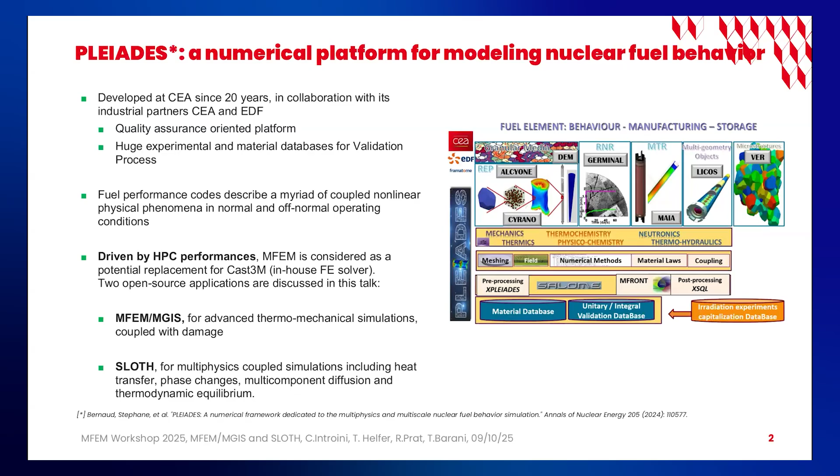So, MFEM-MGIS in a nutshell: basically the idea is to write a generic thermomechanical solver based on MFEM for everything related to finite elements, linear solvers and nonlinear solvers, and two libraries that I wrote called MFront and MGIS that I will describe in a few minutes. Basically the idea is that everything related to the material knowledge that we introduce inside the simulation is handled by MFront and through the MGIS API.

I've shown 4 years ago that one of the goals was to provide a very high level API which is able to describe solvers, preconditioners and boundary conditions, and focus on the physics so that engineers can use it directly without being, I would say, distracted by numerical details.

So the main focus was to be able to describe multi-material models, small and finite strain analysis, isotropic and orthotropic material laws. Most of them were not available in MFEM at the time, so this is something that we added to MFEM in this library. So I give you some references, the GitHub website and the repository, and also a link to the tutorials.

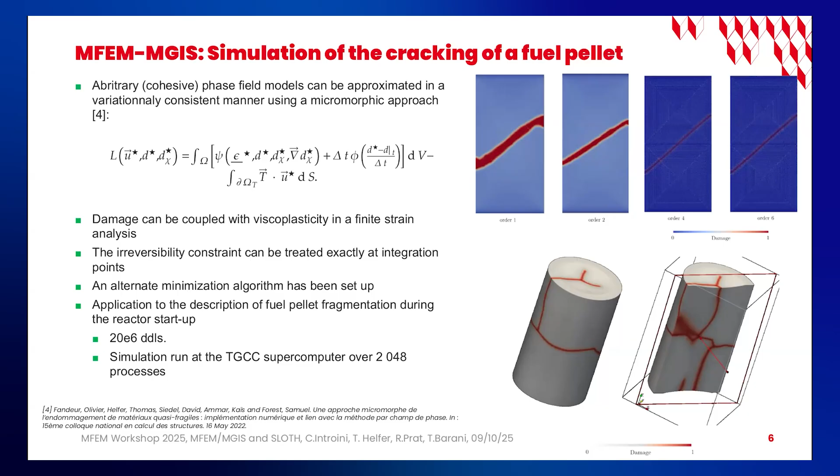And also, we have to mention that the crack propagation is unstable and that you have to break the initial axisymmetrical mechanical field to localize the damage into those cracks, which is quite difficult to do. And we were quite happy with the alternate minimization algorithm that we have set up because we were able to describe this complex crack network, which appears in quite an unstable manner.

So I will go a little bit further to other examples of what we are able to do. In this example, we describe a representative volume element of nuclear fuel, and this is done by my colleague Tommaso Barani. And we try to model what can happen during fuel annealing after irradiation. What happens during irradiation is that we create bubbles with pressurized gases.

And if we anneal the fuel, pressure inside the bubbles increases, and then you have fragmentation of this RVE, which leads to release of fission gas products. So we have set up, in the context of a European project called OperaHPC, a simulation of those effects, and we were able to describe the progressive rupture of the matrix with a very simple model and try to correlate that with the experimental data.

And I'm sorry, it's not quite readable, but you have the experimental data in blue, and at the very beginning of the annealing, we have a good correlation between the release of fission gas products, which comes from the cracking of the bubbles, and the experimental data. So a good correlation between simulation and experimental data.

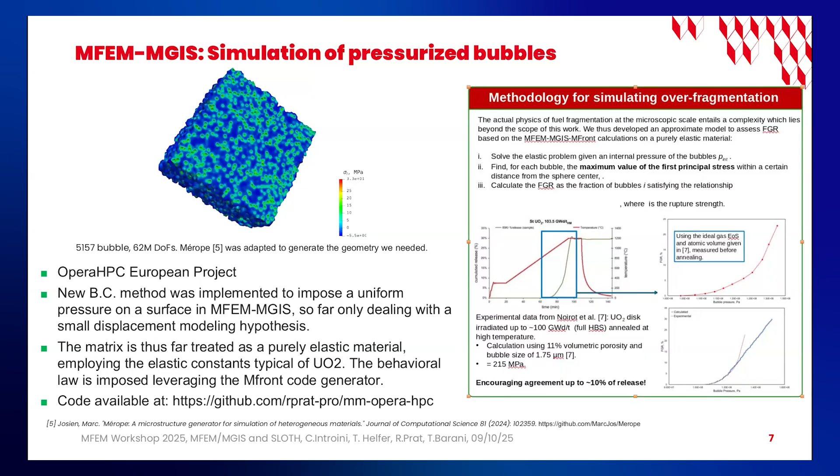Another example, just to show that we do a lot of periodic computations at the RVE level. It's a description of a specific nuclear fuel called mixed oxide fuel, which contains uranium and plutonium. And in this case, we just modeled a matrix and an inclusion, and we try to compare performances and

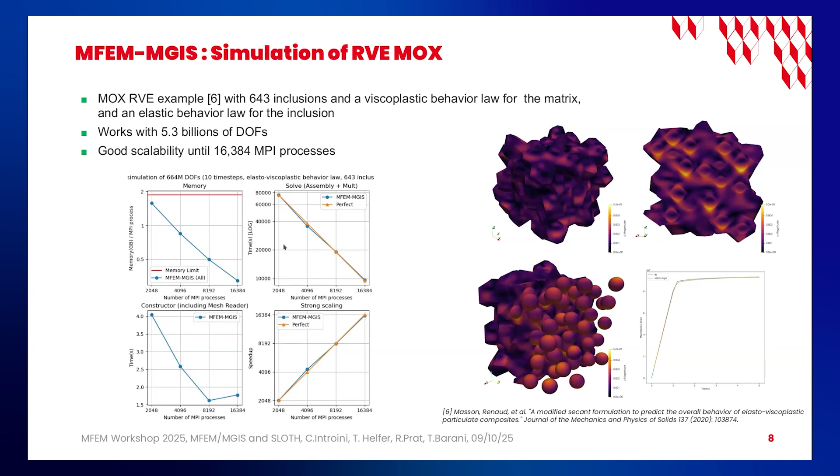make some verifications of MFEM-MGIS against fast Fourier transforms, and also try to measure the performances of MFEM-MGIS on our clusters with good strong scalability, as shown on this figure. So this work on the solvers was mostly done by Raphael.

Last thing that we wanted to mention, MFEM-MGIS is now mostly focusing on post-processing, and we have developed a library to do things dedicated to mechanics. For example, what we do in finite strain analysis is that we have this first Piola-Kirchhoff stress, which is very convenient for the developers of thermomechanical solvers, because everything is simple with this stress, but it's not quite meaningful for the user.

So we have developed post-processings, for example, a post-processing which is able to take the first Piola-Kirchhoff stress, transform it to the Cauchy stress, which is what the user expects, and then rotate it in the global frame for orthotropic behaviors. So we have introduced a lot of post-processings, which are quite interesting for most solvers.

So this module is also solver agnostic. So if you ever have your own finite element solver, maybe you could be interested by those developments.

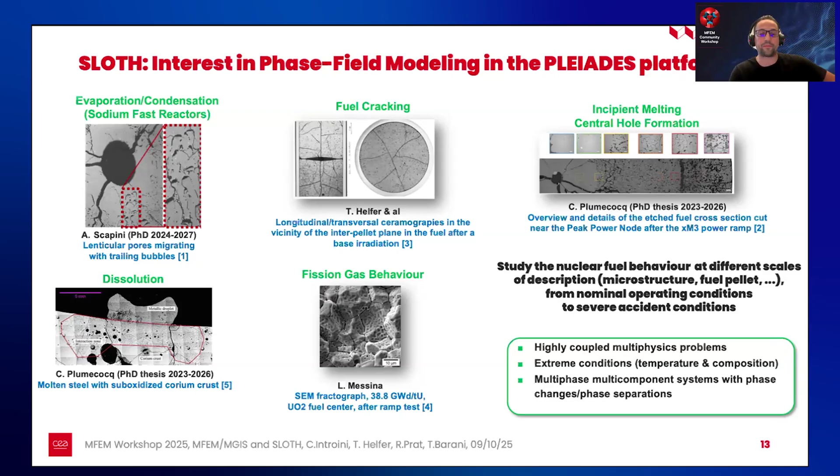So we have developed SLOTH on top of MFEM in C++. It's a small code developed since 2023. It's open source, developed under the LGPL license. So SLOTH provides the Cahn-Hilliard equation, the Allen-Cahn equation, but also the multi-component diffusion equation and heat transfer equation. And in order to perform the multiphysics simulations of interest for our nuclear applications, we also have a coupling between computational thermodynamics and SLOTH in order to perform CALPHAD-informed phase field simulations.

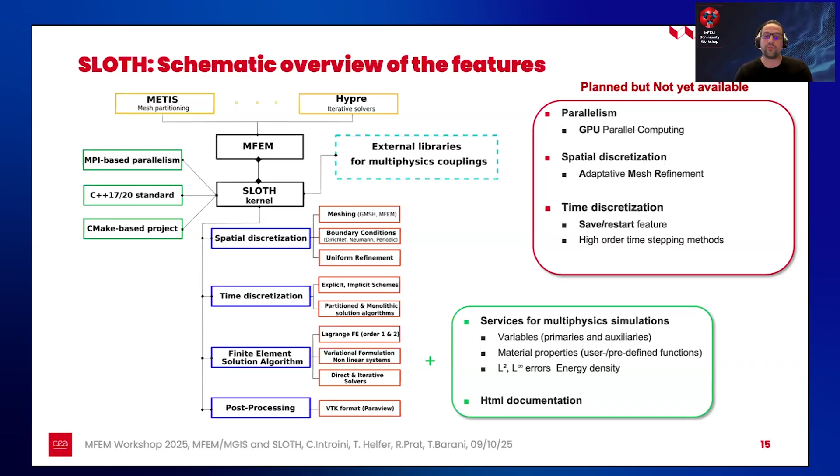You've got about one minute left in the presentation. Oh, okay, very quickly. Sorry. Okay, I present this slide and I finish by illustration.

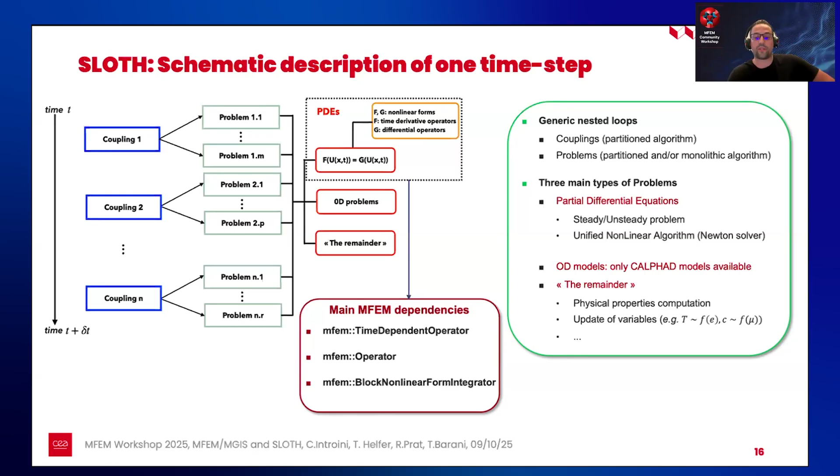So to conclude, I will show you this calculation. It's a very fresh result. It concerns the implementation of the Cahn-Hilliard equation, but not only the implementation of the Cahn-Hilliard equation, because this development now enables us to have a monolithic solution algorithm for SLOTH problems. And recently, for this

test case, a three-dimensional test of two kissing bubbles, we have performed a performance test, and we observe at the beginning of the test a good scalability, but we have a break when we consider a lot of degrees of freedom. So actually, we don't have the explanation. We assume it is a load balancing issue, but profiling and optimization is in progress.

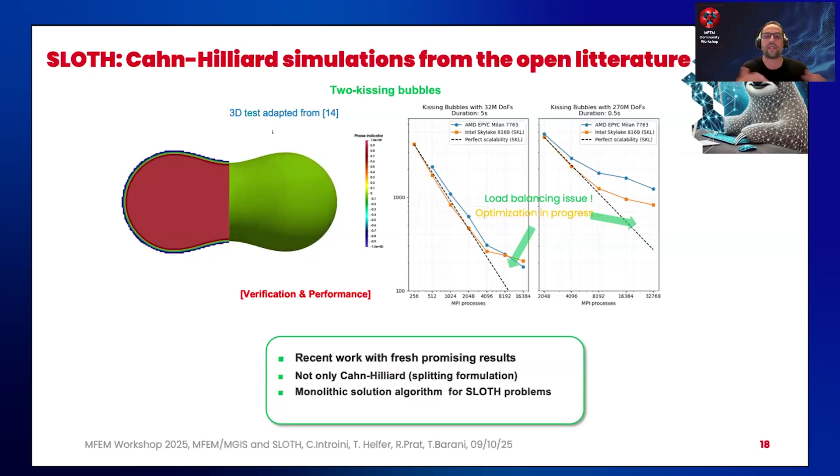SLOTH is a very recent phase field solver built on top of MFEM. The development team is small but dynamic. We have a lot of students, a lot of collaboration with my colleagues at CEA and Polytechnics in France. If you want to collaborate, collaboration is welcome, so don't hesitate to contact us.

So as I said, our future challenges for MFEM-MGIS and SLOTH are GPU parallel computation, adaptive mesh refinement, and we will also develop a coupling between MFEM-MGIS and SLOTH in order to be able to couple SLOTH with thermomechanics. We have some needs.

We can discuss on Slack if you want about the solution algorithm. We use a deprecated method, so if you have an alternative or recommendation, it's welcome. And we have also a need for post-processing.

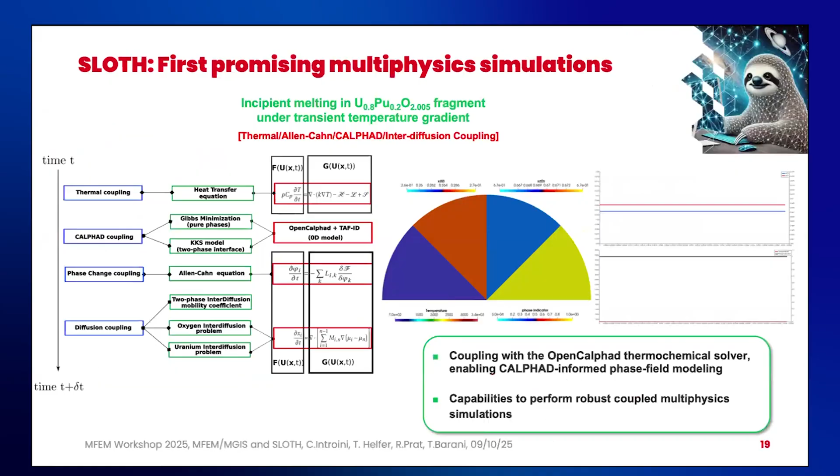I wanted to ask about the post-processing that Thomas showed at the end. Do I understand correctly that this just works in memory where you can pipe operations on unstructured data? Yes. And is this sequence of operations implemented serially, or are some of those merged?

It's like an expression template in C++. So what we do is that we create what we call the evaluators of the values. So it's kind of a way of creating kernels that will be evaluated, and all those operations are embarrassingly parallel because they are executed on each integration point independently. So this syntax is just a way to create the kernels that we want for the post-processing.

And then at the end, you know, there is this SU at the end of the first examples. It's a way to save the results of these evaluations inside a new field. I don't know if I was clear, but basically it's an easy way to create kernels dedicated to mechanical post-processing. It's a nice syntax.